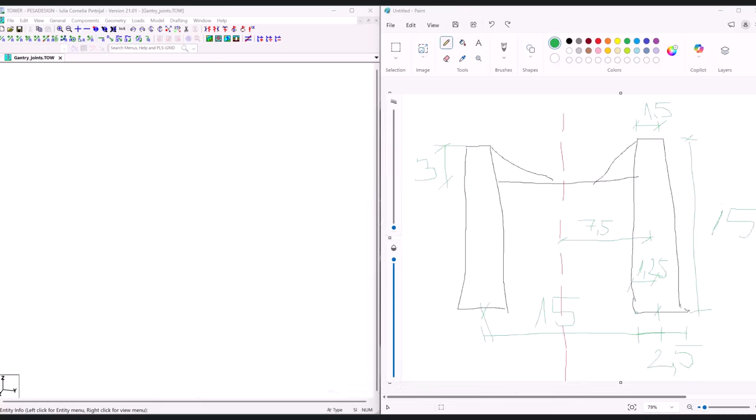Hey guys, today I'm going to talk with you about primary versus secondary joints when modeling a gantry.

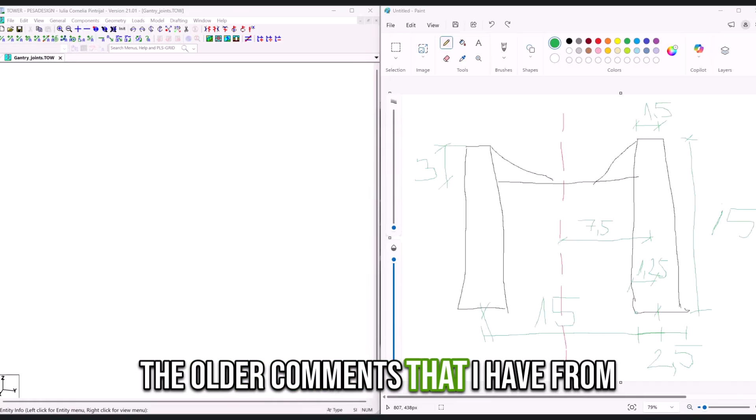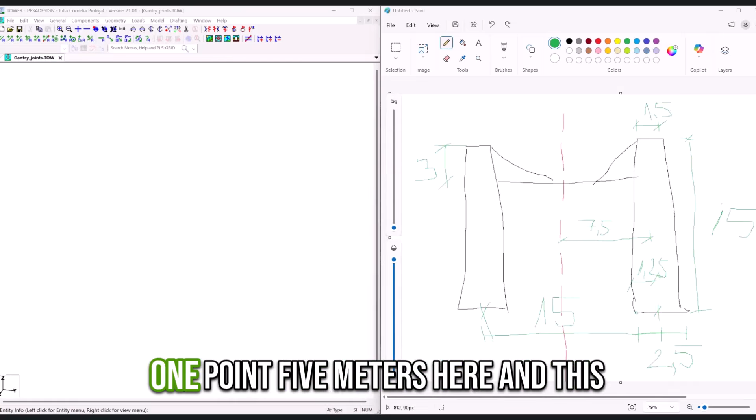So let's get into this gantry. I chose the dimensions in this figure: 15 meters height, 15 meters wide, 2.5 meters at the base, 1.5 meters here, and this is 3. So first, where do I put primary joints? Whenever you change the slope. In this case, we have a straight line.

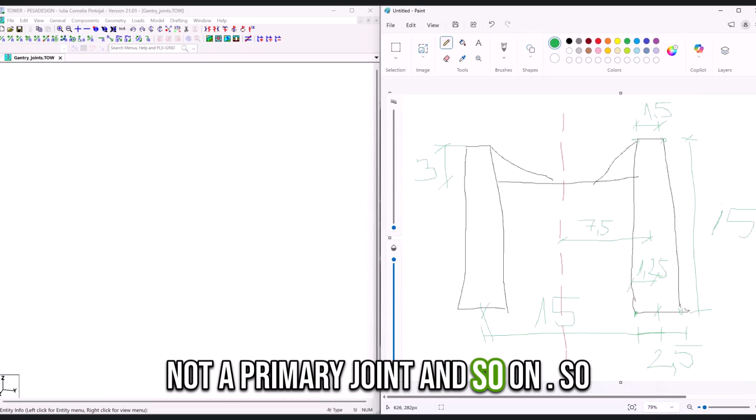So when I design, I put primary joints here, here, here, and here. And that's it, nothing else, nothing in between. This is not a primary joint, this is not a primary joint, and so on. So let's draw first the primary joints. This is number 1, 2, 3, and 4, because I need 4.

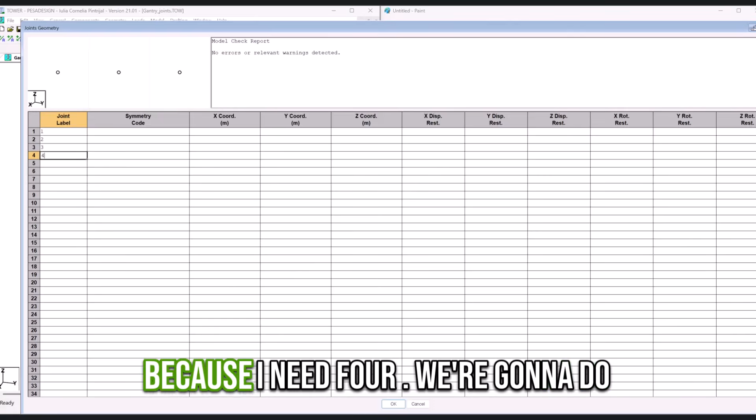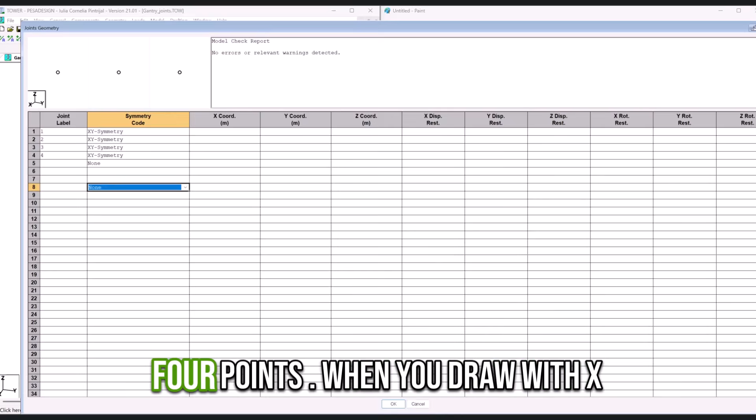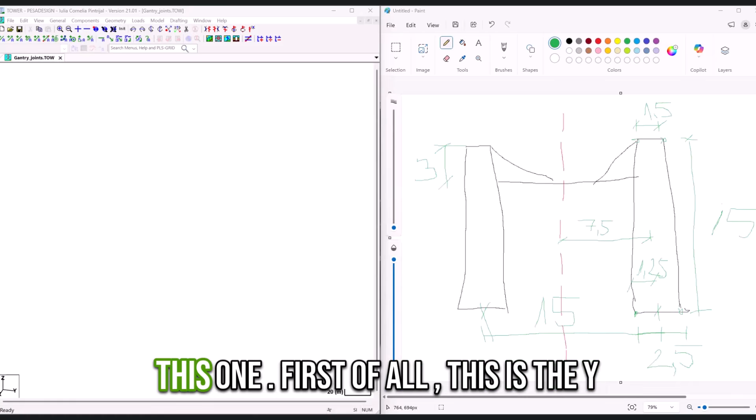We're going to do XY symmetry on all of them, because we all know that when you draw with XY symmetry, you get 4 points. When you draw with X or Y, you have 2 points. Let's see a little bit the coordinates. So I want to start with this one. First of all, this is the y-axis, as we know here.

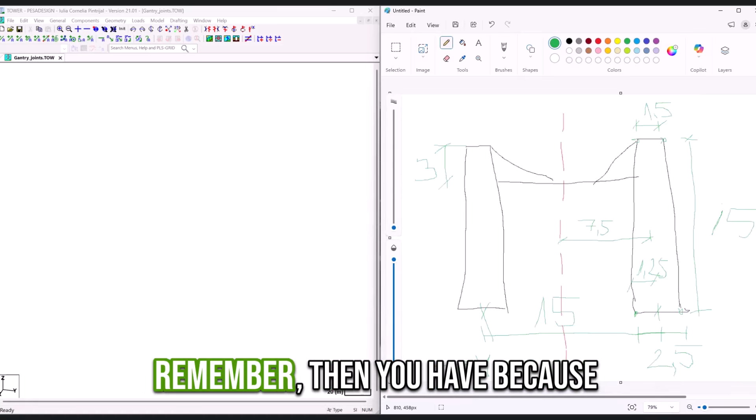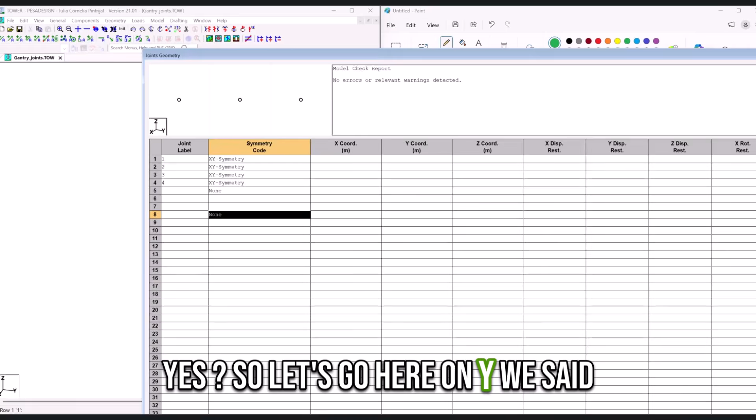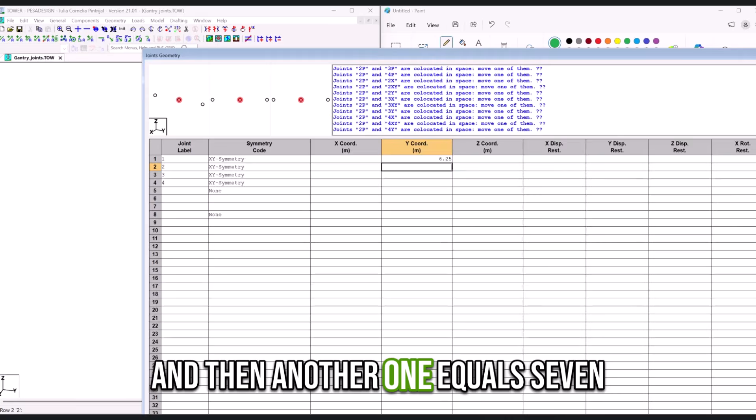So on y, we have 7.5, which is from the axis of your gantry to the axis of your column. So that's the main dimension that you have to remember. Then, because we start to model at the bottom, we have 2.5. So that's 1.25 and 1.25, yes? So let's go here on y first. You can do math here if you want. So that was 7.5 minus 1.25, and then another one equals 7.5 plus 1.25.

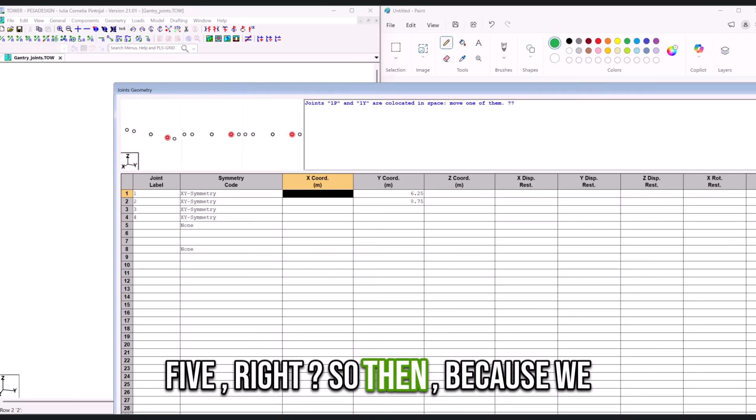Okay. Then on the x-axis, this is 2.5. And of course, this is like a square here, I don't have to tell you that. This is 2.5, this is also 2.5, right? So then, because we draw an axis, this is 1.25, okay? And this is also 1.25.

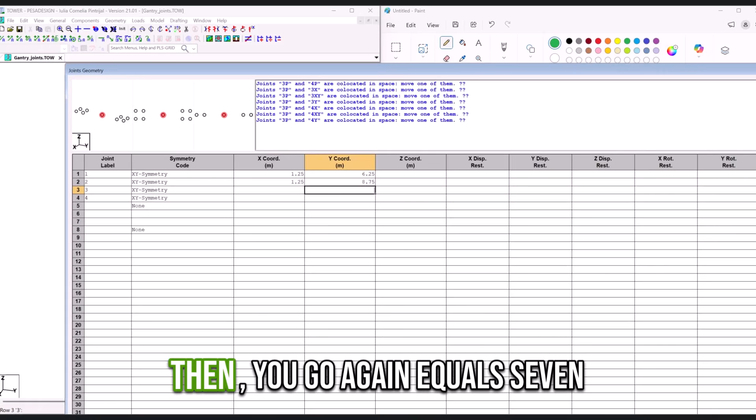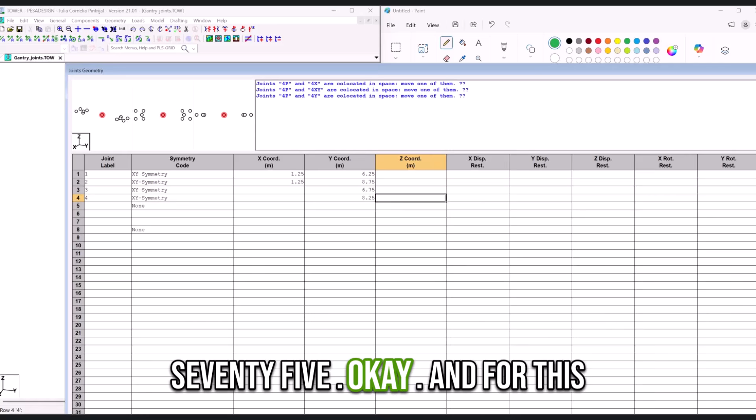Okay, now let's go to the ones at the top. At the top, what do you have? You have again 7.5, but this time you subtract or you add 0.75, the half of this one. Then you go again, equals 7.5 minus 0.75 and equals 7.5 plus 0.75. Okay, and for this one, obviously you have 1.5 here, so that's going to be 0.75.

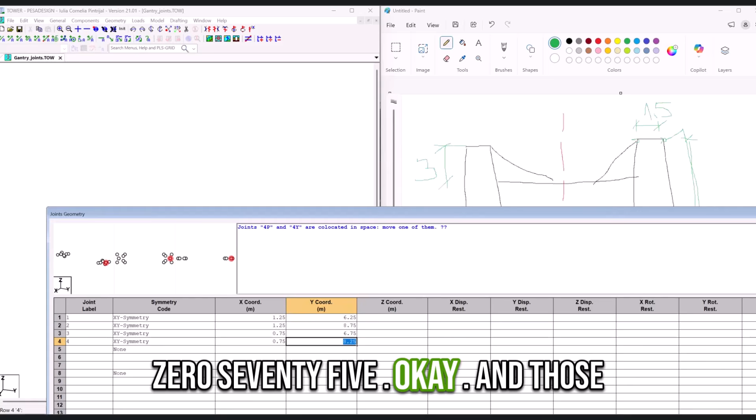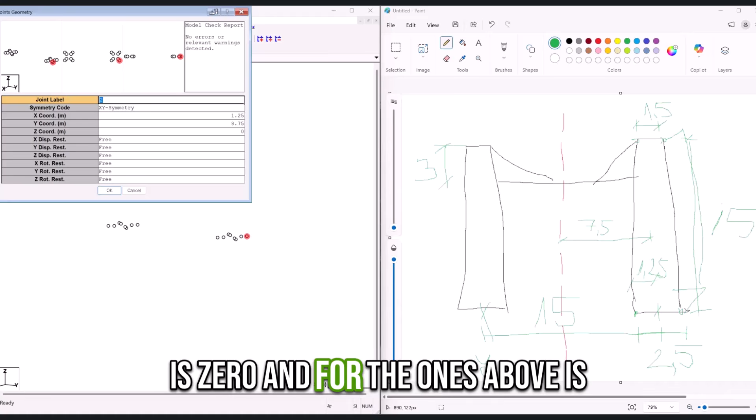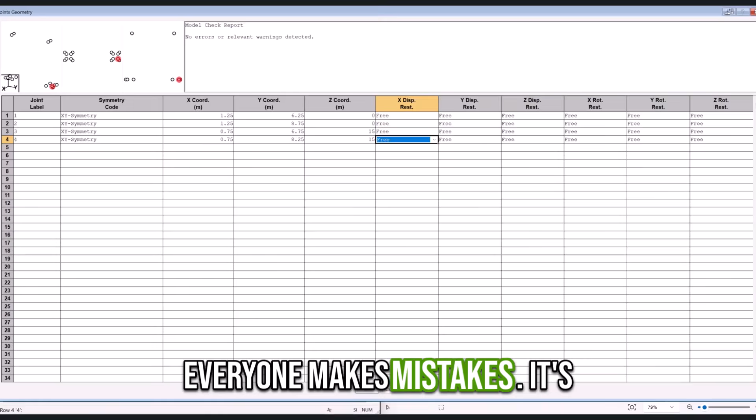Okay, and those are your joints. Let's press OK, and this is what we get. Yeah, wrong. Oh yeah, of course, I put them all on 0. So the height is 0, and for the ones above is 15. Okay, 0, 0, and this is 15. I'm not gonna edit this out because everyone makes mistakes. It's important to just realize in time. Okay, so that's your gantry.

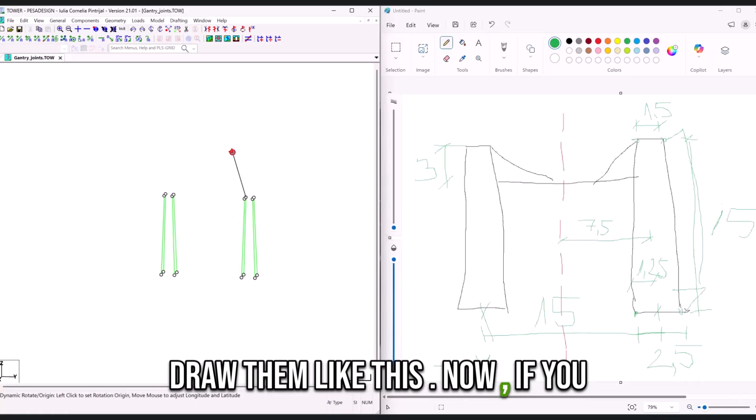Now let's say, obviously, I have here an XY, and I'm going to draw them like this. Now, if you want to check your measurements, I'm just going to remove this one because we don't need it anymore. I'm going to check my measurements like this. This is 1.5, correct. 2.5. Obviously, if you want to see the middle, then you're going to have to draw some over Y symmetry here and here.

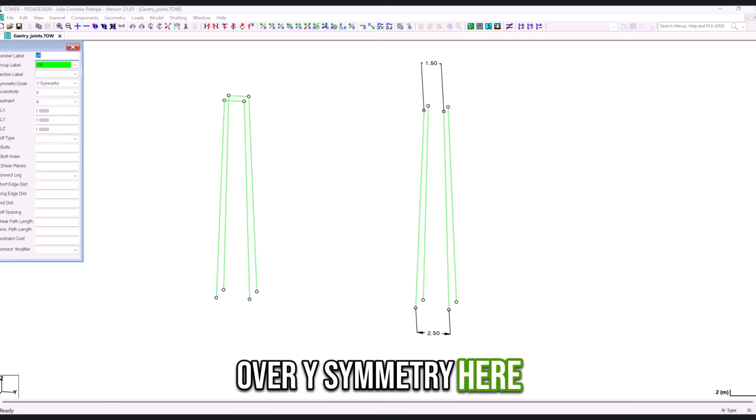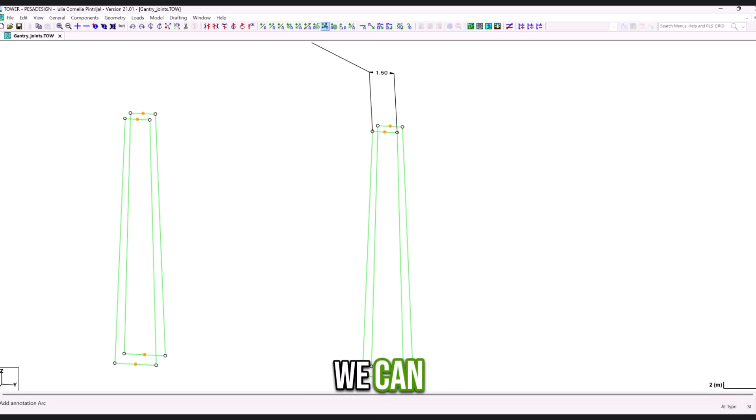We're going to draw one at the bottom also, just for measuring, for the purpose of this video. Split in 2. Here the same, split in 2. And this one split in 2. And now we can find out if it's correct. 15, yeah? Okay, 15, perfect.

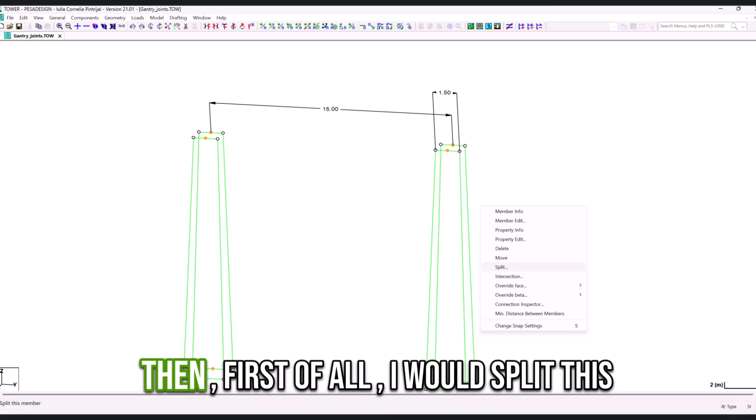Now, what I meant when I said that these are the only primary joints that I define is that I want all my joints, or most of them, to be collinear. So then, first of all, I would split this in two, so I can add the beam at the top. We said it's at height 12, yes. If we look here, this is 3, so 12. Obviously, you remove the fraction.

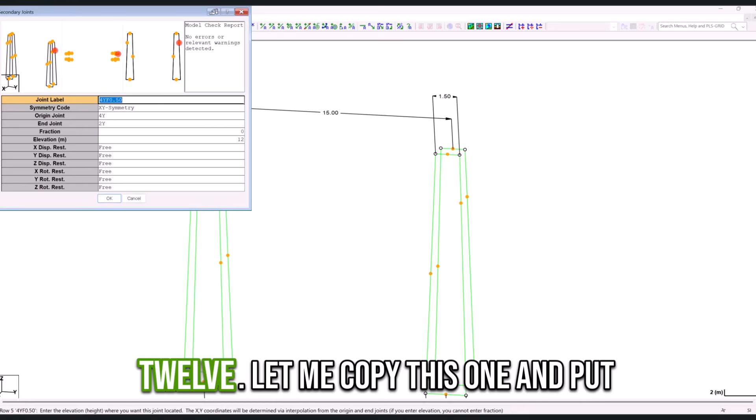12. Let me copy this one and put it here as well. Paste 12, and then I can just draw over y. Yes, okay, this one. Okay, so this is how you draw a gantry, basically.

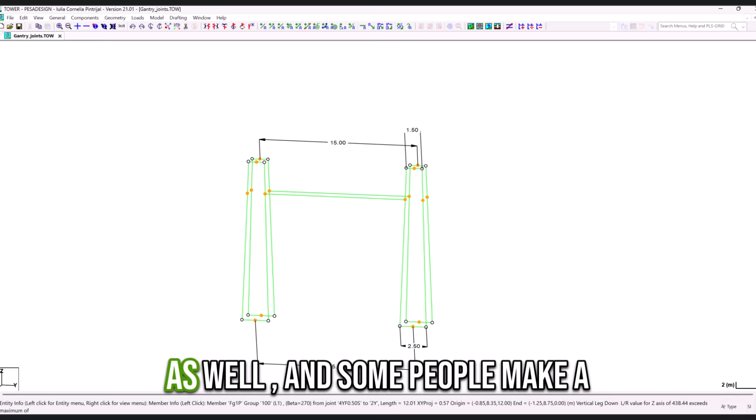Now, I want to show you something that applies for towers as well, and some people make a mistake, and I don't like that. And it's actually wrong, not just that I don't like it. Let's say obviously you have some crossing diagonals here. Let's say I'm going to split this again in two, and I have at 7.75 something as a height.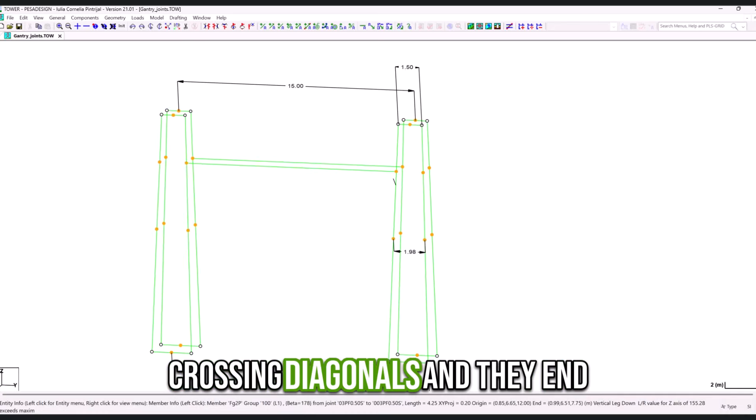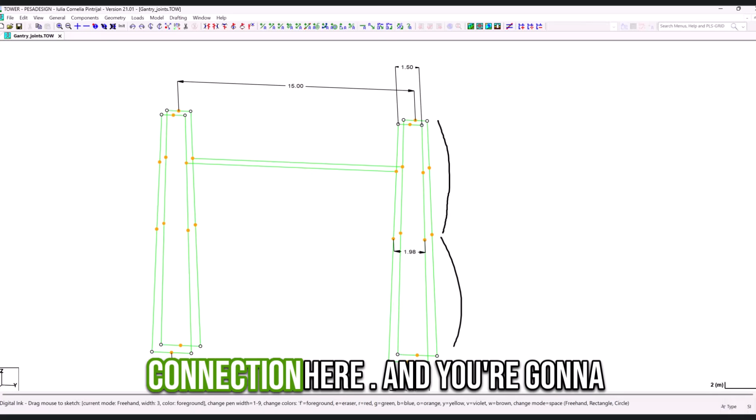Now, if, for example, you have here the crossing diagonals and they end here, and you want to make this a primary joint because of the leg, let's say this would be one leg. Obviously, you cannot have one single profile on the entire length because it's 15 meters and we all know that's not happening. So let's say you have here a separate leg and you have a connection here. And you're going to say, oh, I can put here a primary joint because that's a connection.

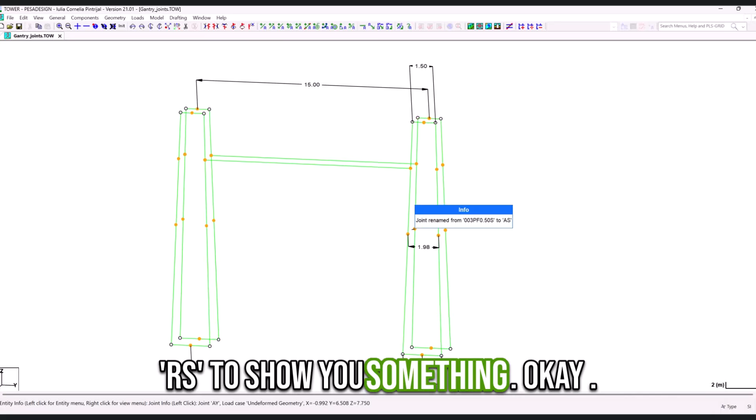No, don't do that unless the slope changes. And the reason why I'm going to show you right now. The name of this joint is pretty ugly, so I'm just going to rename it to AS to show you something. Okay, let's say I make this a primary joint. I think you know how you do that. You press F1, you convert secondary to primary, you have AS, and that's it. That's your primary joint. So let's say you added this at the beginning.

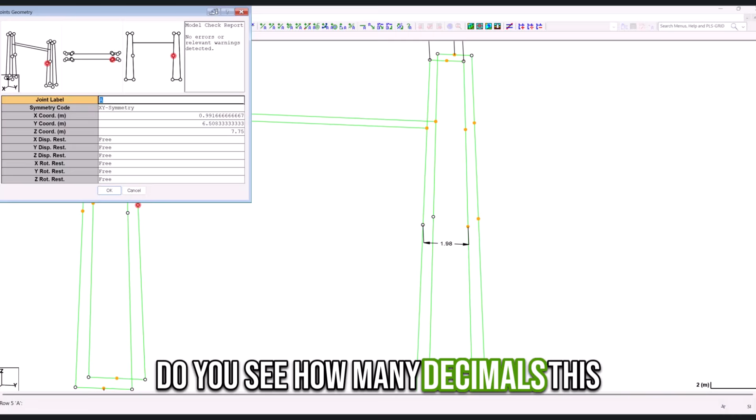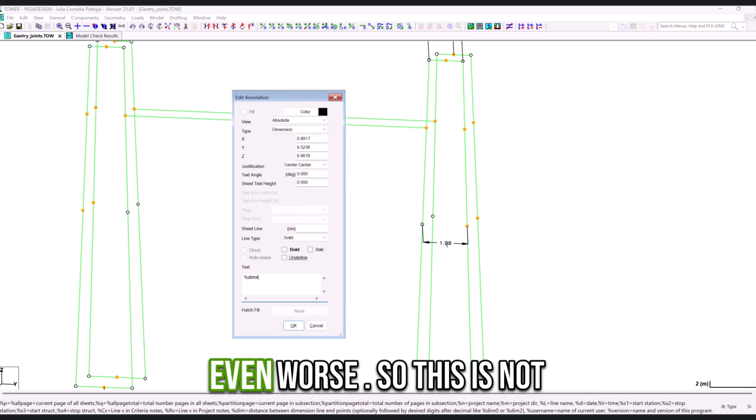Now, do you see how many decimals this has? A lot. Why that happens is because here we have 1.98. This is 1.98 because you have 2 decimals. If you put 3 decimals, that's going to be more than that. Model check, that's not what I wanted. So if you put 4 decimals, it's even worse. So this is not a fixed number, yeah?

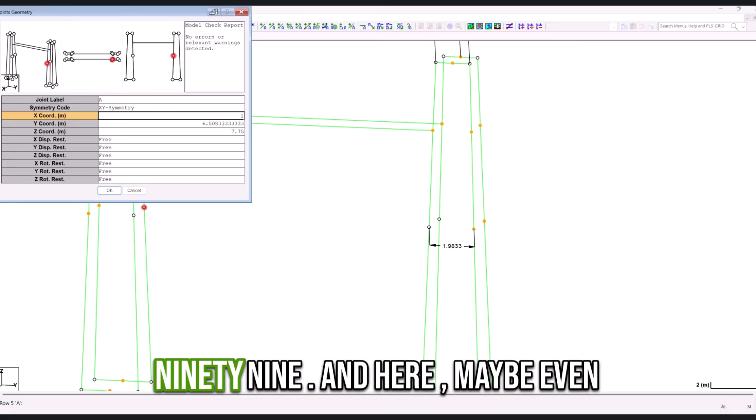So this proves it. These are the decimals that you would have to enter to have a straight line. But if you were to model this from the beginning with a primary joint, then you would have put probably here 1 instead of 0.99, and here maybe even 6.5, yes? So if you look at them now, nothing really changed because it didn't. But I want to show you something really nice. I'm going to make it with none just to show something.

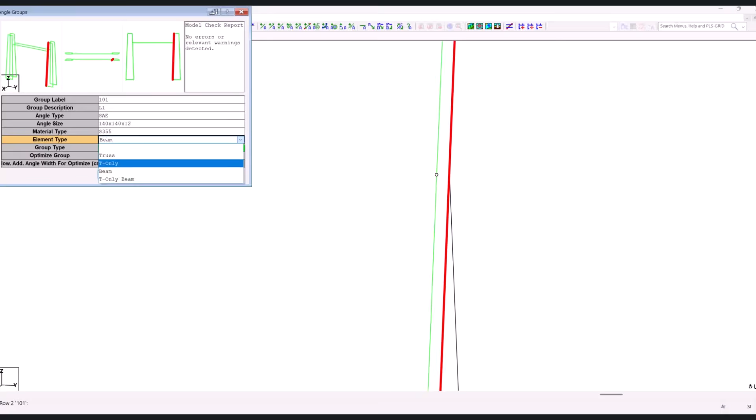Look at the difference. I'm going to make this one red just to show it. So this is the difference. Now, if you look at it from far away, you're going to say, hey, that's fine, it's a straight enough line, but it really isn't. The collinearity has been broken, and that's just it.

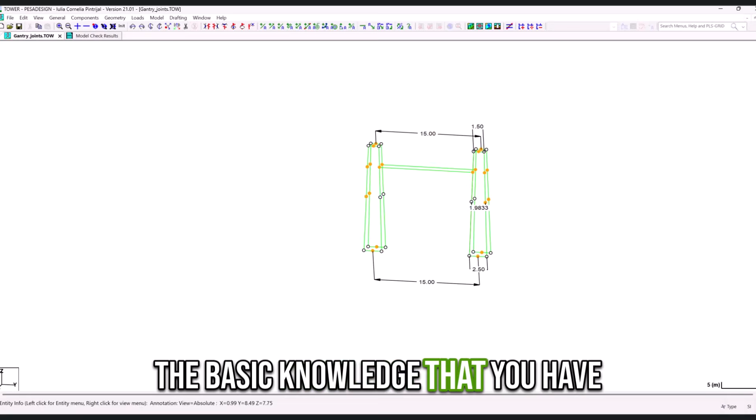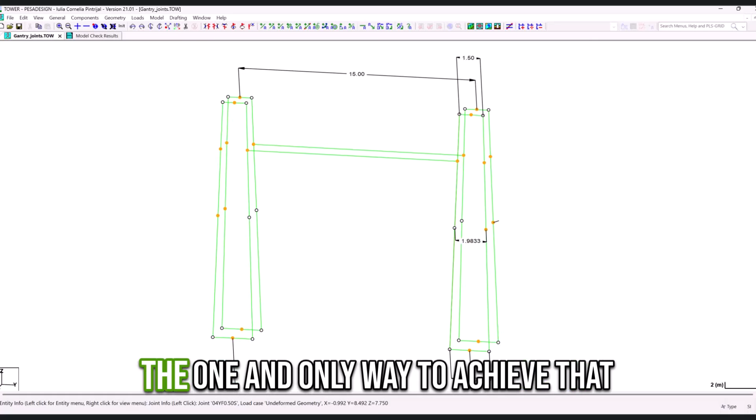So the basic knowledge that you have to get from this video is please don't add primary joints unless you really have a good dimension there, not an obtained dimension, right? If the slope changes somewhere, and this goes for towers as well, then by all means you have to add a primary joint. But if it doesn't, and the goal is to have a straight line, then making it secondary is the one and only way to achieve that, simply because of this. So I hope this makes sense.